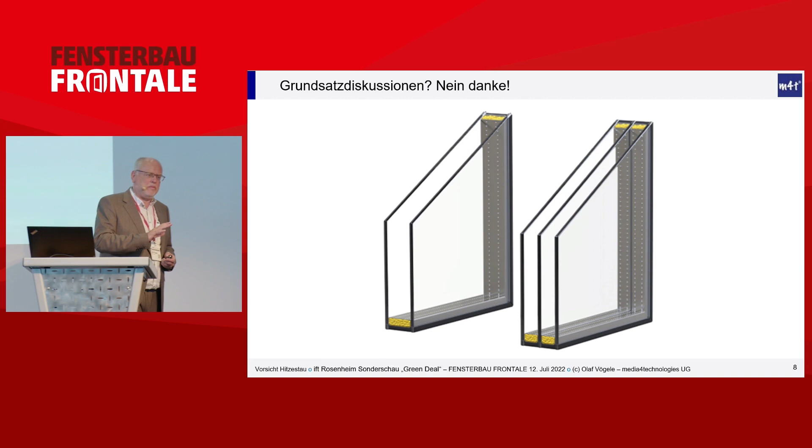I mean, of course, we are talking about windows with a high heat insulation, but if you have an additional measure, then of course it makes things much better and more comfortable. It doesn't need to be triple glazing all of the time. It's not only black and white, there are so many solutions in between. Also, out of cost reasons, it is not always the best solution to add something. I do not want to trigger a discussion regarding whether triple or double glazing is the right remedy. I think we would get a zillion different arguments for both embodiments, which is why let us just skip that and have a look at this slide.

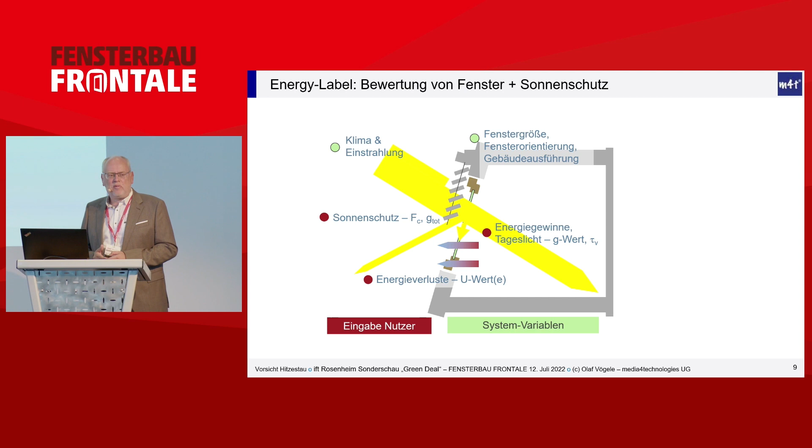This is a slide that is provided by the IFT. On the one hand, we have the system variables that are predefined. This is everything that we can impact. On the other hand, you have everything that the user does. So this is where we do have an impact. And of course, we can then prove how effectively a system works.

The solution is rather having good windows combined with a good sun protection, and I cannot select one product and call it the best of class. It always depends on the house. Something like the best sun protection does not exist. There is always an individual situation. It has to do with the sea level, with the direction orientation of the building, with all of the plants around the building and in the periphery.

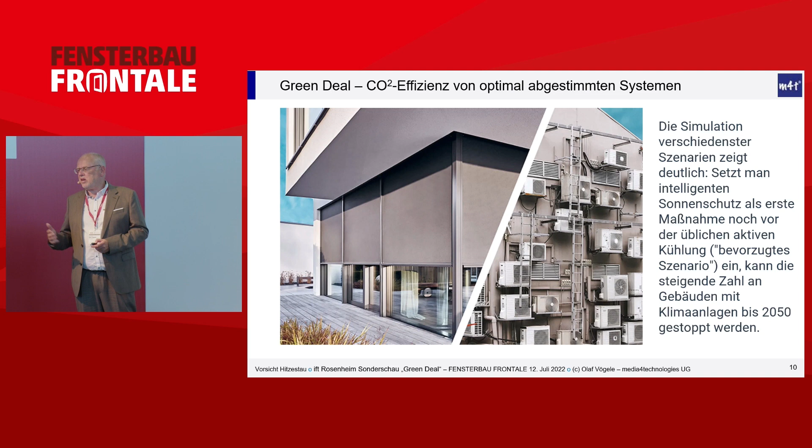And here we see a study of the European Sun Protection Organization of the industry. And here you can say very clearly, if we had additional sun protection in the future, we can certainly reduce the volumes of the ventilation systems. And this is certainly one of the most important things, particularly in view of the energy expenses.

The share of buildings that really need such ventilation system and how much we can save, namely electricity of approximately 870 terawatt hours. This is the energy consumption for Spain alone, and it is approximately 50 million people in Spain. So just put that before your inner eye and think about that.

So we see this situation. We have Venetian blinds in this picture. We talk about thermal comfort. We talk about visual comfort. We also talk about sun protection, perhaps also glare protection, and also some sort of privacy protection because there are neighbors all around us.

So I can just tell you that the Venetian blind sometimes might also be provided with some sort of sound signal that gives off an alert if, for instance, somebody tries to break into your place. And how do we control all that? Well, we control that with the structure of the glass panels. We have the coating. This was also something that we've talked about, also the filling with different gases.

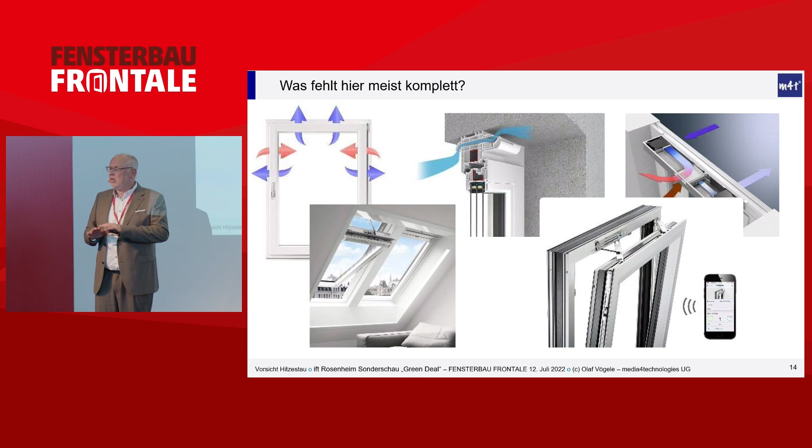I have a couple of different drafts, particularly when it comes to those rooftop windows. For instance, if I live in the attic, again, I can actually try to ventilate it naturally. And if I see a ventilation concept, here is a ventilation concept as well. Where is the window? Where is the sun protection? I mean, all of it is here, integrated somewhere. So I've actually fulfilled all of my tasks.

I've provided for everything that was needed, and I've invested a lot of money, but I will not get the result that I could get. And I've experienced that myself because of Corona, I spent a lot of time at home in the past 2 years, and our house is equipped with smart home for approximately 98%.

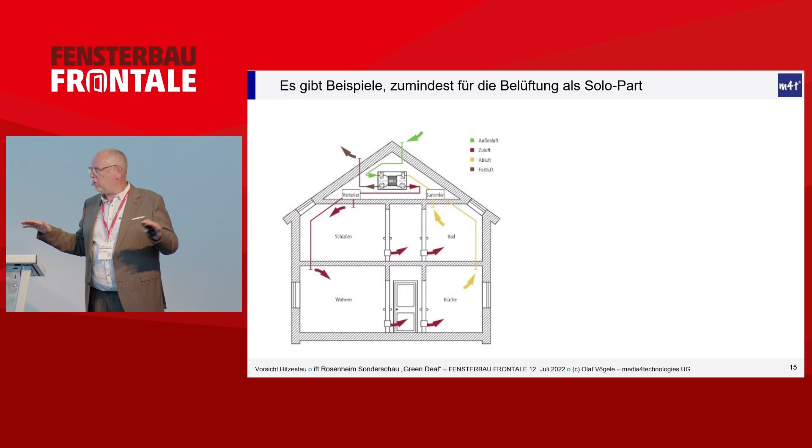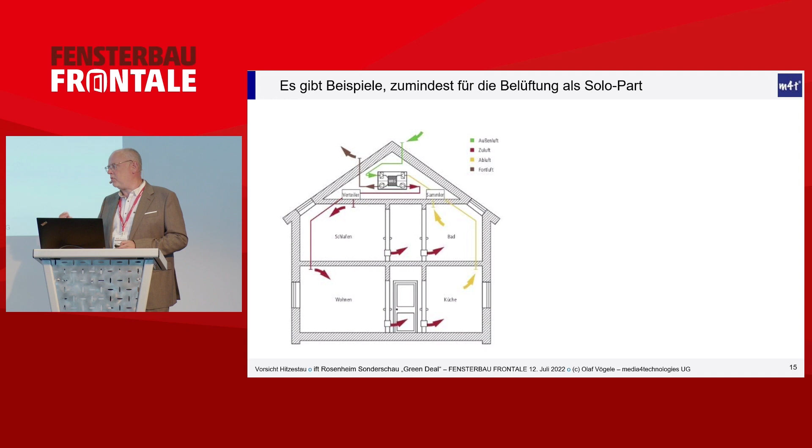And now we've actually made it last summer to improve the interior temperature by reducing it by 7 degrees Celsius without changing anything about the mechanics of blinds or anything else, only based on the automated window systems, also the supply air, and we have a minus of 7 degrees, which makes it very comfortable in our house while it is hot outside.

All of those areas are communicating actively with the sun protection, with the sun shields. And the question is whether the ventilation concepts will suffice with all of the air exchange rates in order to avoid the heat in summer. Because in summer, it is not 6 times, 8 times, 12. It is only about trying to exchange the air as quickly as possible in order to get the right temperatures in the house, particularly the heat that is stored in furniture and in other surfaces.

So, what can we do against heat accumulation? We control the sun in new buildings, in retrofitted buildings, and we are measuring in the units kilolux and wind meters per second. If, for instance, with the Venetian blinds, it is 12 to 14 meters, or the zip system, this is when you have to lift all of those shields. How do we measure it? With a wind sensor. It is a combination of wind sensors, outside temperature, frost protection, and other parameters.

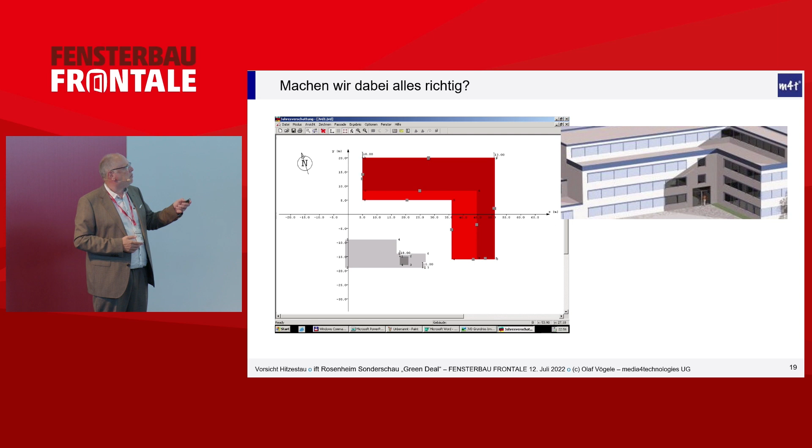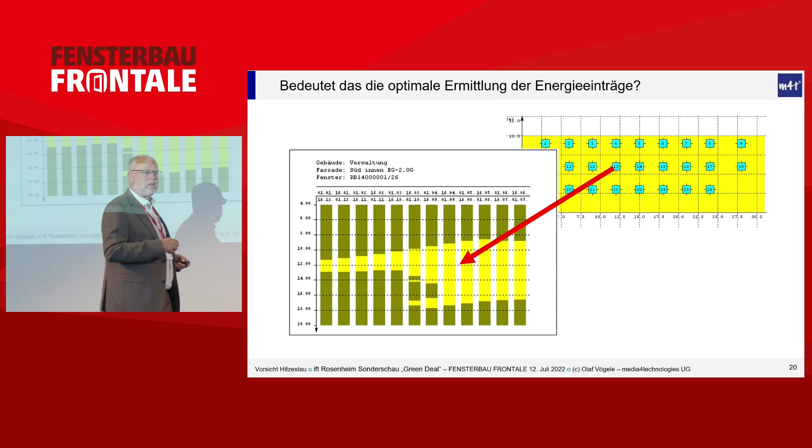And if we now look at a building with an annual shading program, here, for instance, you can see this corner that is taken as a reference point. So here we have this window number 13. Do you see that? I've marked it. And based on the astronomical calendar, for this window number 13, I can tell you for every single day when exactly it will be exposed to the sun. So when is the sun shining on window 13? And I could actually do that for the next hundreds of thousands of years based on the astronomical calendar.

However, if we ask ourselves whether we measure in the right unit, is kilolux really the right unit in order to measure the heating in the house? This is something that I've also sort of disregarded until last year. But ever since last year, I'm dealing with the question of getting a photovoltaic system, which has changed my mind. Because let's have a look.

In Germany, the median of the global radiation is 133.67 watts per square meter, which is tantamount to 1,171 kilowatt hours per square meter as annual overall quantity. In Spain, it's 230, so they have 100 watts per square meter per hour more than we. Now the question is, what shall we do? I've already shown you this picture. We are measuring the temperature, the rain, the wind, and the brightness in kilolux.

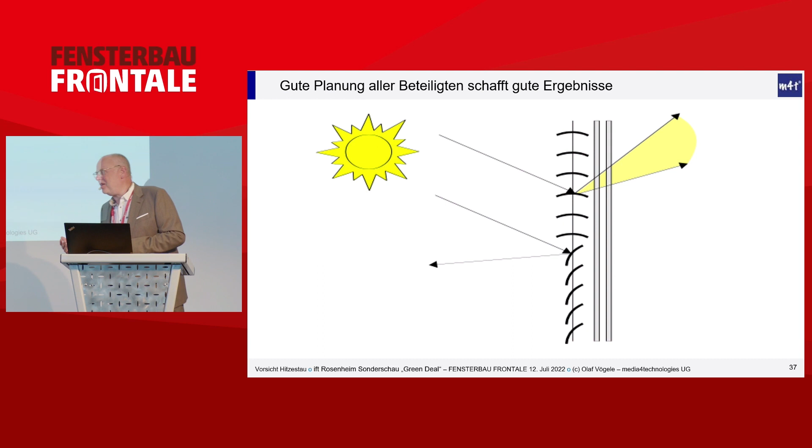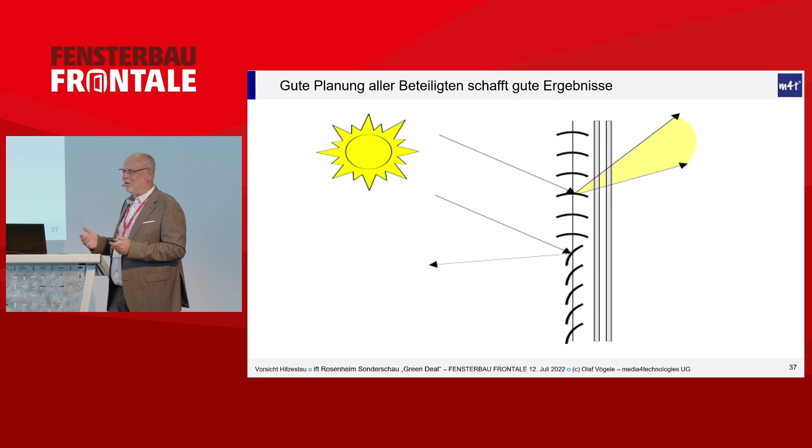So this is something that I really like discussing also in public, also with my colleagues from the magazine Glaswelt. So I can tell you we have fierce discussions, but still, I've already described it and you've seen the bullet points. It is actually enabling us to live and work in a better environment, in better surroundings, and the decision and selection criteria really depend on the situation and cannot be generalized.

The user of all that needs to live with it, because unfortunately he or she is only to a small extent involved in the planning process, because they will not get any explanations as to what it is all about. And very often it is a pain point when you hear what went wrong for a lot of money and how much it costs to really get that rectified, even for the best architects, people who are not familiar with physical properties and physical requirements. That's, of course, a big issue because this architect will never live in the house he has constructed and built. And then you have a user sitting in their house for 4 million euros and they have to spend some 300,000 euros in order to get all of the automated controls in place.

Well, the consequence of many of those things can be seen in office buildings. You can see that there are some staff members who are really rebellious about those systems. They don't want to live with it. They don't understand why the sun blinds and the sun protection are lifted all of a sudden. Perhaps this facade is somehow coupled to another facade, and one facade is exposed to wind, and then there is a wind sensor, and the facade tells the other facade, okay, there's wind, lift the sun protection.